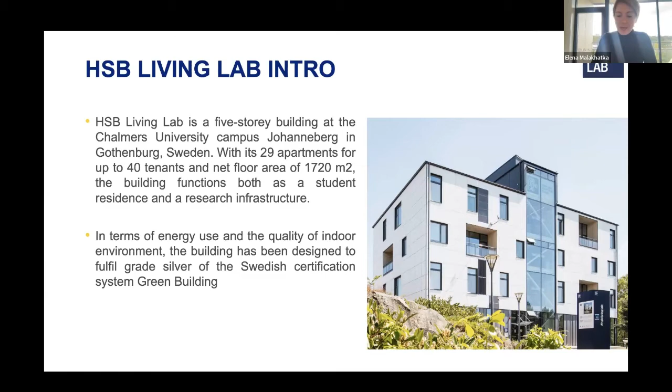Talking about the building itself, because I understand this community is much more interested in the building side, I'd like to highlight one thing: this building was designed to be placed at Chalmers for only 10 years. So those who were at the beginning of the process had to think, okay, in 10 years we need to move this building—we need to deconstruct it, disassemble different parts, and move it somewhere else. Now it's year number 8, so in a couple of years it's pretty high probability that we need to move this building from Chalmers, maybe even from Sweden—we've discussed a few places. Definitely those who designed the building understood they should think about deconstruction from the beginning.

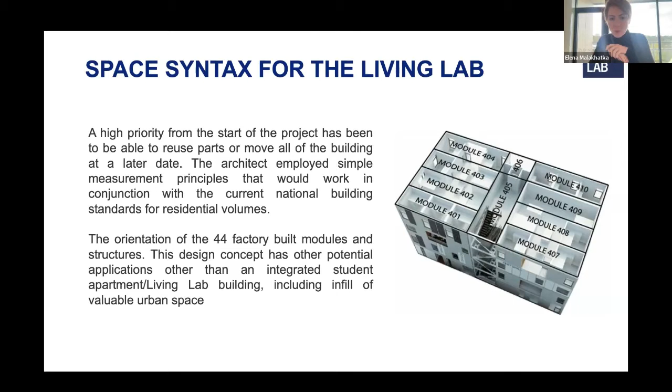So they of course thought about many modular kinds of projects. They considered the container mindset, container logic, where this building could be transferred as 44 factory-built module structures—so 44 trucks, or even less, might really help us move this building from place A to place B. That's an interesting starting point when you have the ambition to design a future place, but also from day one think you need to 'kill the darling' at least in one location and build it somewhere else again. So that's actually about understanding the context of flexibility and temporality in this specific place here in Sweden at Chalmers. This external factor of the building conditions also creates a very strong internal reflection, where we try to look at the rooms not just as square meters, but more as cubic meters.

How can we really interpret space in a much more efficient way? Even in our advertisement, when we rent out the students' apartments, we talk about cubic meters of life, not square meters, because clearly we make use of much more space than before, if we would not have this condition about container thinking.

So let's create a bit of a unique setting for this building, and unique setting for general perception of the space and its engineering and architectural style. And talking about that, as mentioned before, it's not only a building, it's also a research lab. It's a combination between two mindsets: living space and laboratory.

So we try to still highlight some topics and themes to focus on, but of course it's a very brief starting point. We can definitely go much broader, and my study doesn't fit most of these categories, but still: materials and technologies of the building, minimization of resources, multifunctional common spaces, accessibility—not only from the user perspective, but also how we can make this accessible for different stakeholders and different actors interested in innovation—as well as the production process, how we can really innovate the way we design, construct, and operate buildings.

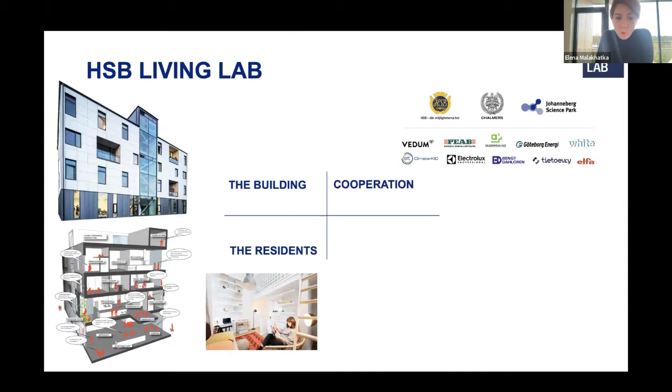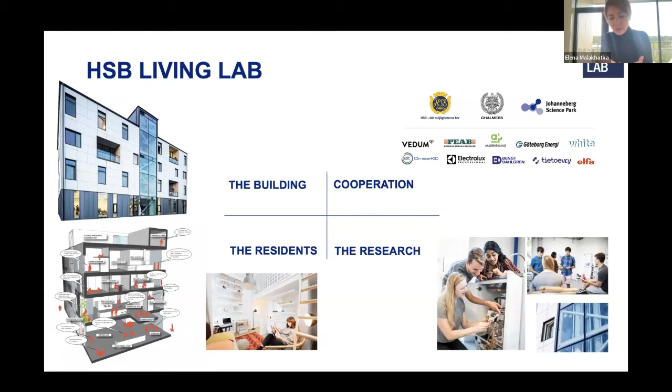We can't do this type of project alone, because we need different collaborations and cooperations, and that's, I think, what all of you are also doing a lot. And obviously research—all of this should be handled by a research process and research initiatives.

And if we come back to the definition—many of you know this definition, and many of you know about the European Network of Living Labs—they focus on a few things, such as real-life environment, iterative approach, co-creation, cooperation, rapid prototyping, and multiple actors and stakeholders. Once you have these elements, you can say, yes, we do have a living lab.

Because I think most of us have a lot of these projects where it's testing but only one actor, or testing but completely ignoring the users—not only tenants, but maybe users as designers or architects. So in this case, there are a few pressure points to call your project a Living Lab. I would like to really stress this.

But why specifically do we need to innovate with the user? Why am I trying to be this ambassador of the end life of the building, or use life and end life? Why is it so important now to talk more seriously about end users, and not only mention them in our occupancy rate energy plus modeling? I think the latest IPCC report clearly stated that if we want to decrease the carbon emission

footprint in our building industry—the middle graph B on the right side, building industry—the yellow color bar, which has the potential to go down in CO2, is called end-use technology adoption. And if you carefully read this part of the IPCC report, you will see how much pressure will actually come to the end user technology side.

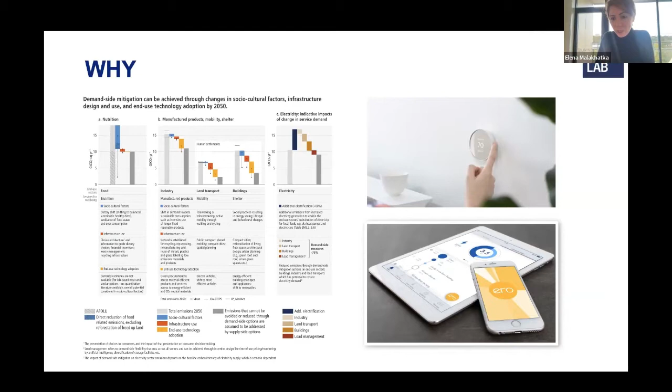And even if we say, oh, we're only doing facade in the early stage where we might not know who will use and how a user will interact with facade, well, depending on family size, depending on their activity rate, there are different strategies how we can address these things. Significant researchers over the world point that there is a potential and we need to grasp it somehow.

Talking about how, when we come back to HSB Living Lab as a project, we started with a lot of angles and perspectives to analyze, not only the physical aspect of the building, but also the kind of personality of people who will live here. Also culture—is it a multicultural place? Is it monocultural, and so on? We try to really work with different perspectives while doing the design phase.

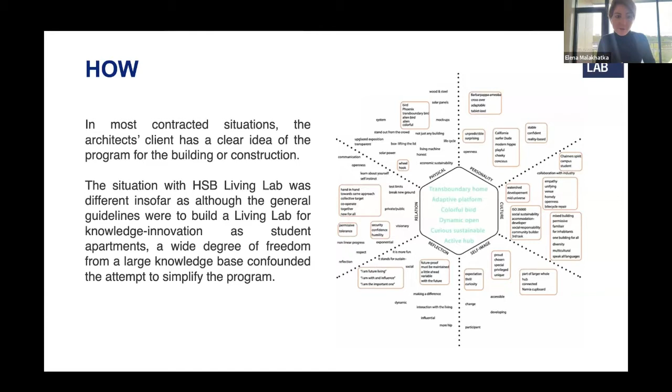Obviously, maybe some of you know Shea Hagy, the researcher who was involved in the beginning of HSB Living Lab design and development. He was a very strong believer in collaboration between different actors at the early stage. He believed that we need to bring those who will live in this building—in our case, we knew it would be students—and we need to start working with them before we even put the first foundation layer.

Many of you know this report, Next Generation Living Labs. The TU Delft project is also mentioned and highlighted well there. So we would say that in the beginning, it was this hypothesis that by understanding daily behavior in high resolution, we can design a better building.

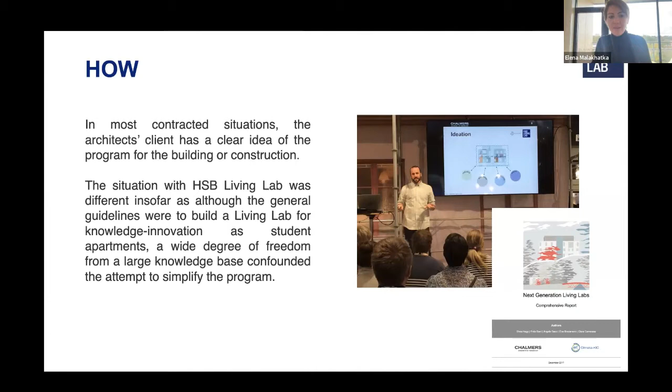And this hypothesis actually validated itself over time, as we're now almost at the end of the first iteration of this building's life—and it's an ongoing project. If Shea was more focused on the beginning of the design phase, how to design spaces, how to consider things, it shouldn't stop just at the design phase.

It should continue. And that's where my role now comes in, doing a lot of participatory activities around everyday life—how they cook, how they do laundry, how they clean, and so on. Because life is happening now, and this life requires resources, which the building is supposed to provide to our tenants.

It's not only about saying it's a research project, please participate, but also understanding that we have value to co-create with you—help us to do a better product for you, help us to deliver a better service for you, better comfort, and so on.

And definitely there's a good and bad side to doing this in Europe—there's very strong pressure from the ethical approach, which I personally respect a lot. Yes, it might slow down the research project, yes, it might create pressure to remove some elements, but it also in the end builds trust, which is not always the case when you just have access to end users.

HSB Living Lab Plus is also the idea that Living Lab is a starting point for how we can go outside to the neighborhood level. In one of the projects, we needed to consider more social groups, and I asked HSB to contact their members and go outside just our Living Lab. So Living Lab, again, I always consider a starting point—a dot on the map from where we can build more strategies to collaborate with citizens and other stakeholders.

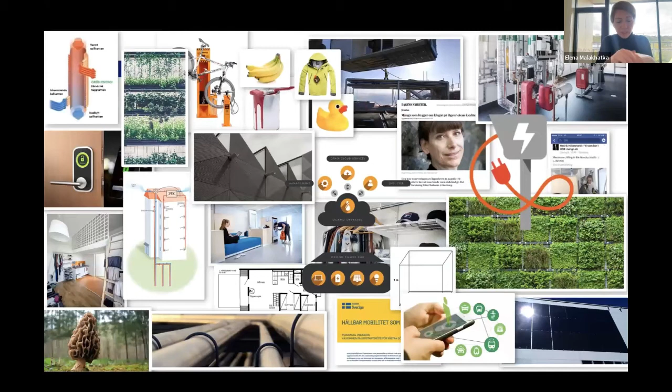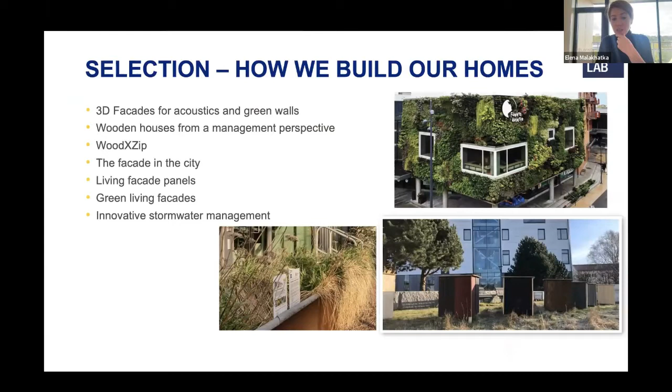To wrap up what I said—more than 200 projects so far have been tested at HSB Living Lab. I'll start with a topic which probably most of you are interested in: there's a lot of work on facade, and we've tried different types of facades and projects related to them—how we can really do diversity. We created a structure with exchangeable wall elements, so we can test different types of insulation materials or PV panel solutions.

So facade itself is a kind of living lab, and we can compare different rooms, like indoor comfort and energy consumption from heat and so on. The idea of flexibility, and the fact that this building is temporary, creates this opportunity to make the building much more flexible for research.

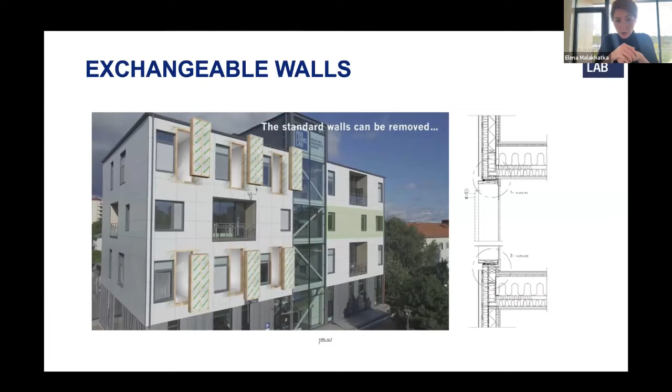Of course, a big part of the research portfolio is energy, from facade and PV panels, battery storage and energy management systems, smart apps, heat recovery from the showers. The list is huge, it's really an important topic.

But my one reflection here is that it's not only about doing research, but also sharing research with society. I was surprised when I announced the Everyday Energy seminar this spring, and the room was packed with neighbors and ordinary people who have so many questions while we have an energy crisis in Europe. So the Living Lab is also a place to meet and really share knowledge and do valorization with society. I was surprised how big the interest actually is towards this topic.

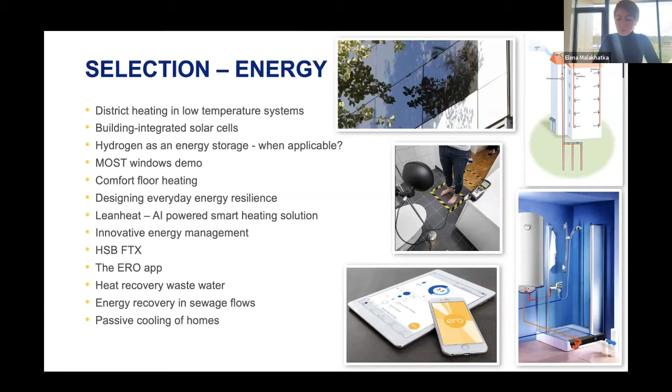Obviously, water is a big discussion, and there are a lot of studies on water quality and so on. From one side, you can say, well, in Sweden you have a lot of water, why do you care? Because we think we shouldn't be so selfish and only care about ourselves, which is part of the journey here.

But also, can we collaborate with South Africa and help them with avoidance of zero water day, which they had a few years ago? How can we really develop technology which can be used in other parts of the world?

That's where the 50 liters program comes in, where we try to minimize consumption and really see how we can be smart enough, but also without compromising comfort too much. So there's a lot of technological tests happening in our showers. In my shower, I have several solutions for water cleaning or heat recovery from the shower.

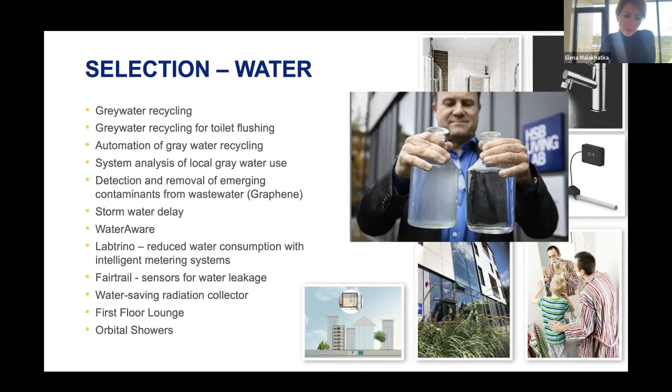Laundry, a little bit of the history. HSB was the pioneer 100 years ago in public laundry, the idea that laundry could be shared as a social place, but also infrastructural sharing, since not all apartments here have laundry machines and dryers. So it's a pretty central part.

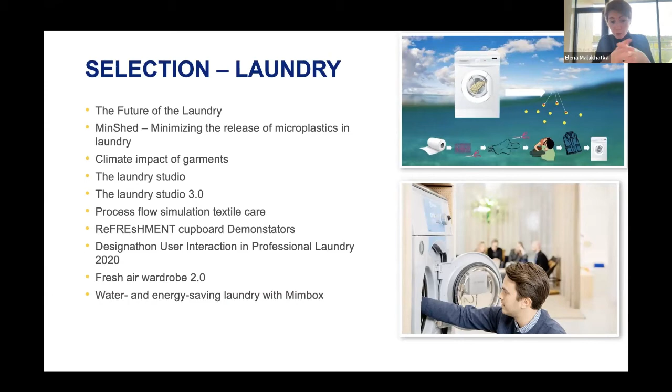We also went really deep into understanding different behavioral aspects and water quality, because today we already recognize that all these laundry systems deliver a lot of plastic into water systems, and we try to solve this type of problem.

Of course, resource management on all scales, from materials of the building to how users treat their own resources, such as clothes, mobility, and so on. How we can support both engineers, construction side, and others.

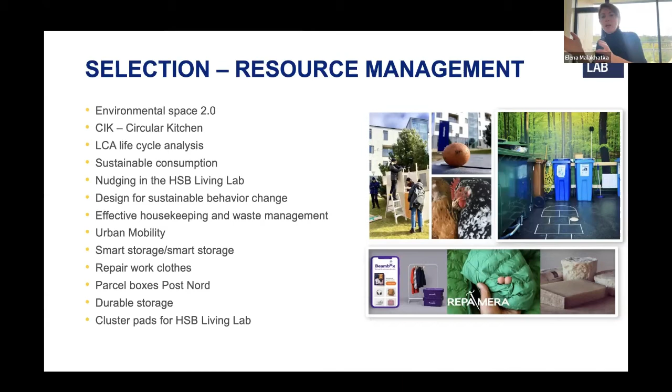Now, for example, from the construction side, we have a big project related to designing with earth. We are testing the clay wall indoors now, but we will also test outdoors since next spring. So it's a lot of discussion about more of a Sankey diagram of resources within this building. I'm just checking the clock.

Yes, I have a couple of minutes. Definitely about how we live, it's a lot about food systems, resource materials, sharing stuff, and so on. It's a very socially focused type of study.

But again, the question is how it might relate to, let's call it facade and design. Because sometimes some students have a balcony with sun, some don't, and they are really designing solutions for how to create events on the sunny side of the building. So even in the use stage of the building, there are a lot of possibilities to reactivate the initial ideas of architects and building designers, showing that the potential could be used even more.

The same with these exchangeable walls, how we can really understand the life inside from the point of which type of facade is designed in a specific part of the building.

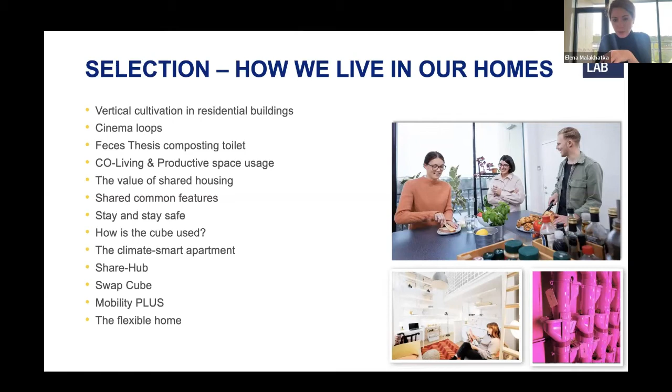And definitely smart home is relevant, as Sweden is in general one of the most digitized countries per capita. We definitely consider the topic of technology in our home, but also the discussion of how to balance the presence of technologies with respecting privacy and ethical attitudes, how we can really approach technology with respect to users' needs and preferences. That's where the idea of co-creation and shared responsibility becomes crucial to succeed.

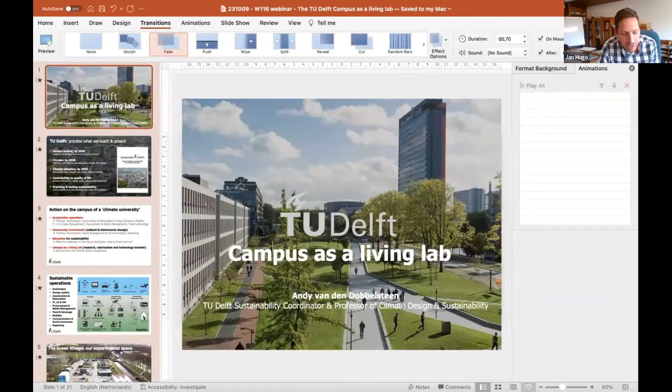Andy will be sharing with us work on the sustainability ambitions of TU Delft, where one goal is to make the campus a large living lab for sustainable innovation and experimentation. They're looking at an entire transition of vision, ambition, action, and an action plan written with a budget of 100 million euros. Of that, 20 million euros is allocated for innovation on the campus, for which a governance structure and decision process was designed. This is currently in use, and researchers can submit their plans for innovation, pilots and living labs, which are assessed by a working group that advises the Campus Innovation Committee. The first of 6 has been approved and will now be starting, and Andy will be sharing some of that work.

Andy, we can see your screen now. That's all working, yeah, we can. Perfect, thank you very much, sorry, now it's doing something terribly wrong. I was trying to get my microphone working again, and now it's doing something I don't do. Okay, anyway, I'll pick it up, thanks Jan. Maybe I'm not visible, can you hear me or not? We can hear you perfectly and we can see the screen. Okay thanks, but you can't see me I guess, right? We can't, let's see if I can switch on your camera as well. Why is it doing this?

Okay, I will just move quickly because we lost quite some time. So at TU Delft, we have our sustainability goals for 2030: carbon neutral, circular, climate adapted by 2030, contributing to quality of life and biodiversity, and also exploring and testing sustainability on the campus. And that, of course, links a lot to the living labs that we're talking about today.

What are we doing? We have a rector who says that we want to be the climate university of the world, so we need to take action on the campus as well. Sustainable operations are an important part of that. Community involvement also, because we want to involve students, academics, but also supporting staff, management, visitors. Our core work, of course, is in education, so we're now looking how to implement sustainability in education at every faculty that we have. And related to research, the campus should be functioning as a living lab. So we're not talking about separate living labs, but the campus as a whole should be a living lab for all sorts of innovations on sustainability.

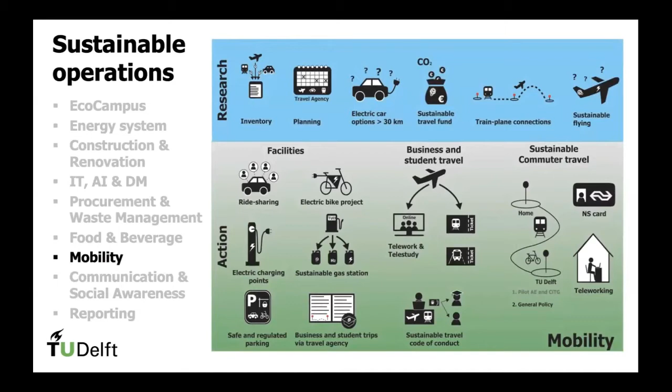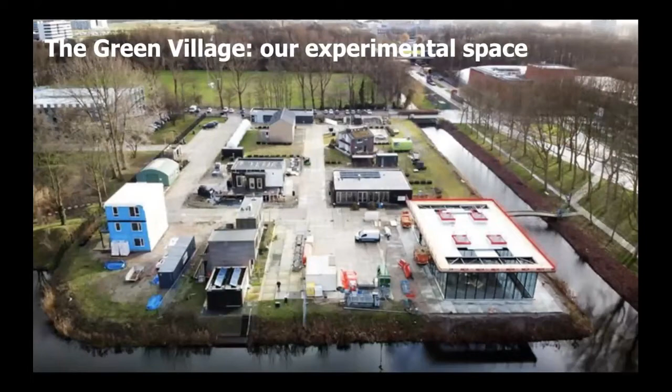Apart from the action taken at our university, we also link it to research, so that what we do is actually being assessed, evaluated, and changed when necessary. Now we have the Green Village on our campus, which is an experimental site where the old faculty building of architecture was situated, where we test out all sorts of innovations, mostly related to sustainability of housing.

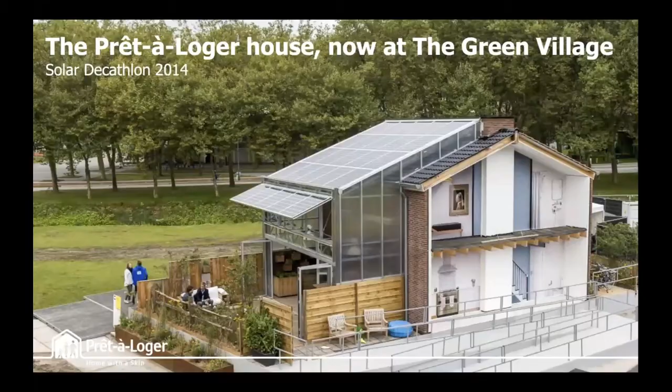To give some examples, this is one of my Solar Decathlon projects with the students from 2014. It's still there on campus. It's now being used by a Ukrainian family, so refugees are living there now, and they're part of the experiment as well. We also have the MOR Pavilion, from Solar Decathlon 2019, which is now functioning as a meeting space on the campus.

So these are real life living labs that are functioning. The last Solar Decathlon project we did sadly stayed in Wuppertal because they have their own living lab over there. It's now open to visitors from Germany, and we decided not to take it apart and travel back to the Netherlands, but leave it there, which is about 3 hours drive from where we are in Delft.

Now, these are things that were already happening, but we also have our sustainability program, which has 20 million euros available until 2030 to invest in innovation on the campus in the form of living labs. There's an innovation funnel for decisions on which projects we do and which we don't.

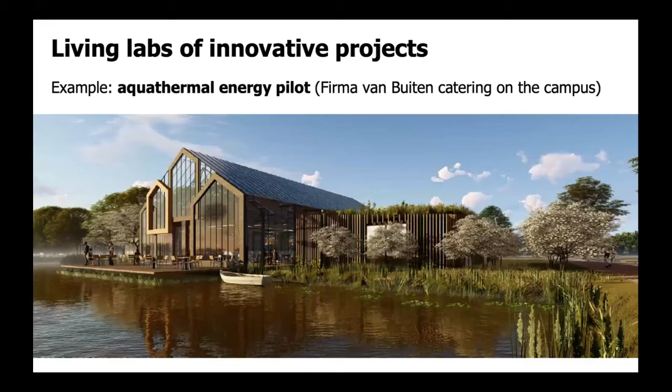But also other things we're doing on campus are being monitored a lot. We have two buildings that are energy neutral according to calculations, but of course we need to monitor and see where it goes wrong, if it goes wrong, and if we can steer it.

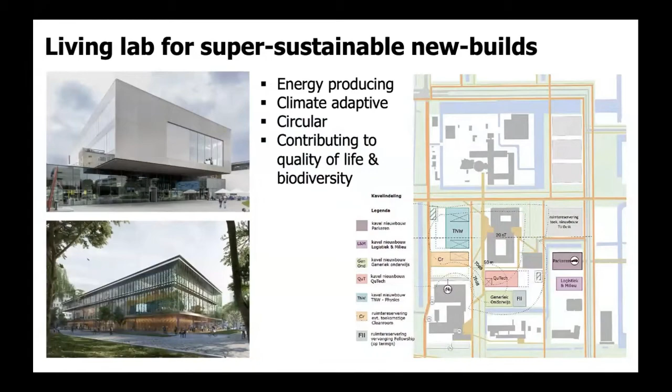There's new developments on the South Campus on the right-hand side, where all these new buildings have to be super sustainable. And of course that requires some innovation here and there.

Also our energy system, which we're adjusting to geothermal heat on one hand and renewable power production on the campus, is actually a living lab where we test out all sorts of things, especially interseasonal storage systems for high, mid, and low temperature systems, to see if that functions well, if we can exchange energy, etc.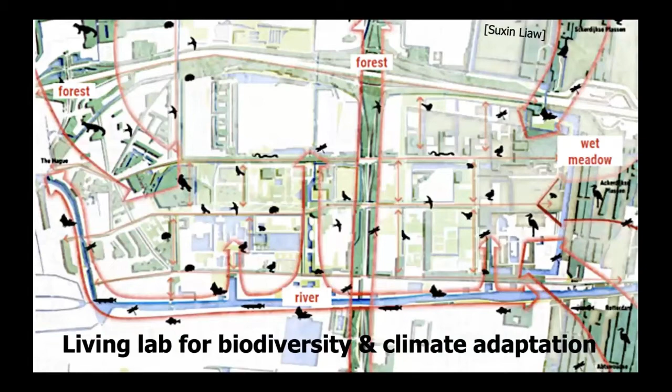We also approved a plan to combine biodiversity and climate adaptation. There's a strong link between these two. So bringing in valuable green space and water storage on the campus will also help to become more climate adaptive. That's also something we are measuring at the moment, and we will keep measuring in the future.

An interesting thing is also a living lab for a new financial approach. So the total cost of ownership with a CO2 price is being used at the moment for all important financial decisions. That's really important because the current economic system doesn't really support sustainability a lot. It actually leads to the choice of other things.

In procurement, we are trying to get our supply chain sustainable by using the R-ladder, starting with refusing to purchase things, reducing demand, reusing products, etc. But we cannot do it alone. So we have new agreements and circular contracts, which is also innovative, with suppliers and partners that collaborate with us so that they can actually change their supply chain.

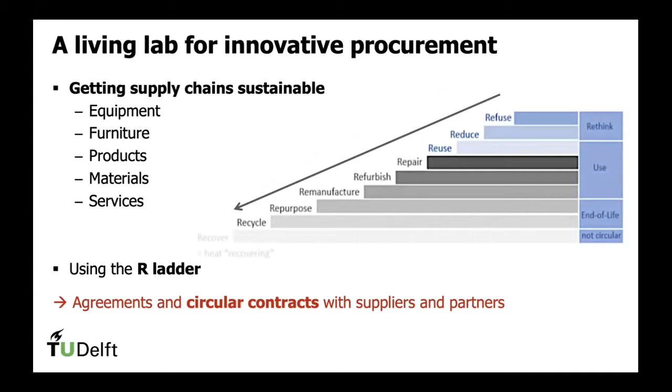We're also a living lab for sustainable food on the campus. This, of course, has caused quite some turmoil because we decided to go for much less animal-based food, which is actually scientifically supported by the Lancet journal, which did research on what is a planetary health diet—a health diet that the Earth can carry. We decided to go for food that follows this division of types of food, and as you can see, about 90% of it is plant-based with a little bit of animal-based left over.

In our case, it means that we have some vegetarian and vegan restaurants at the moment on campus, not all of them yet, and not all will be changed. But that's also important to measure, to see how people behave and if people are satisfied. At the moment they are, but there's also still variety to choose from, and we'll have to see if that works.

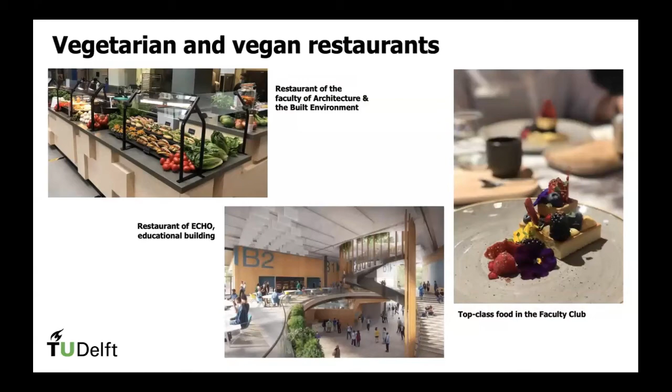A more innovative approach to food production will be to combine buildings with food production on the roof and in facades, to find synergetic effects with carbon emissions, waste, and nutrients in wastewater, and also to make those greenhouses support the energy system of the building. That's also something we want to test out. It's not there yet, but there are several research projects already doing that.

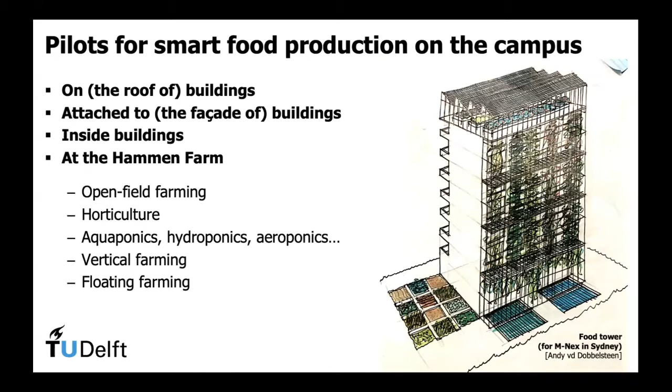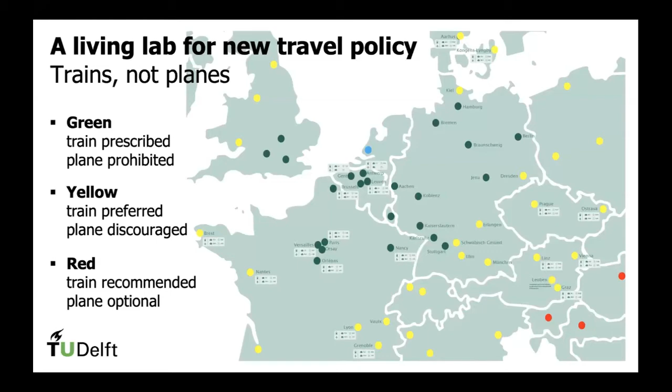Another interesting one is travel. Travel is one of the most carbon emitting activities from our university. In Europe, we decided to go for avoidance of flying on short haul distances up to 800 kilometers or 8 hours of train ride. You should actually take the train or a bus or electric car. Even in the rest of Europe, we are supporting other forms of travel than just flying, unless you have really good reasons not to. This is being monitored as well to see if it works.

Altogether, you can find the latest news on the sustainability website of TU Delft. Good to mention also that we are not the only one taking action. Chalmers is a university we collaborate with, also Aachen, Milan, and Zurich. We produced a report describing the 5 different approaches across these universities, and I recommend you download it. It's available for free as a PDF, and it can inspire other universities to do similar things. That's what I want to finish with, and I'll give the floor back to Jan.

Thank you very much, Andy. This was a very quick and jam-packed presentation, so I'm sure we'll have lots of questions. You had to catch up. Yeah, thank you for that.

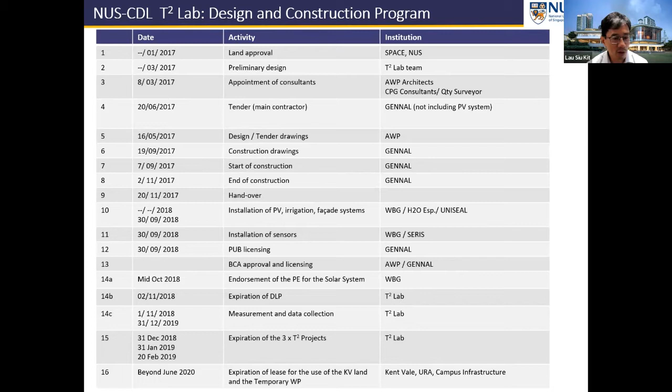I will skip this video because it's probably 2 minutes long. It's kind of construction. You can see what it started from at the very beginning.

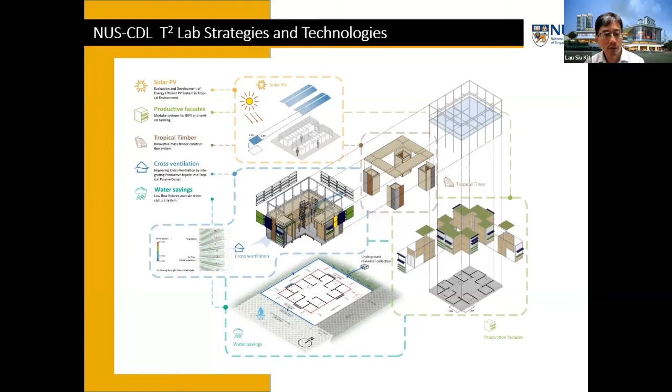The building itself is built with more than 200 sensors. We have a weather station, and indoor and outdoor sensors to monitor wind speed and temperature. We also monitor solar energy and other things, including temperature, humidity, air velocity, solar irradiation, light intensity, and flow rate.

The original design is self-sufficient. We are fully powered by the roof panel, but right now we're connected to the power grid because for some experiments we have used more energy than expected. So we also have the option to switch to the grid and draw more power if needed for the experiments.

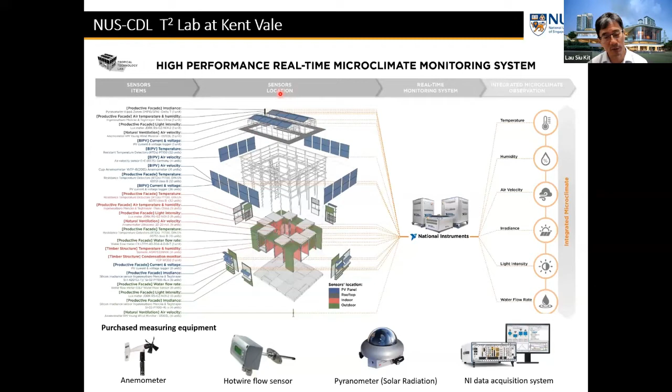The building design, in fact, has 8 small rooms, each around 1.8 meters by 1.8 meters, very small rooms. Each side of the facade faces exactly east, south, north, and west.

From our first run of tests, we wanted to test the balcony versus without-balcony effect. What you see here in the drawing is the first setting: one unit is with a balcony, another unit without the balcony, so each side has 2 rooms in the same situation. That's the reason we can collect data simultaneously for 4 sides of the facade under different settings.

The other 4 corners, in fact, are testing the timber structure. Even now we are testing another setup, more focused on the co-location of solar energy and food production.

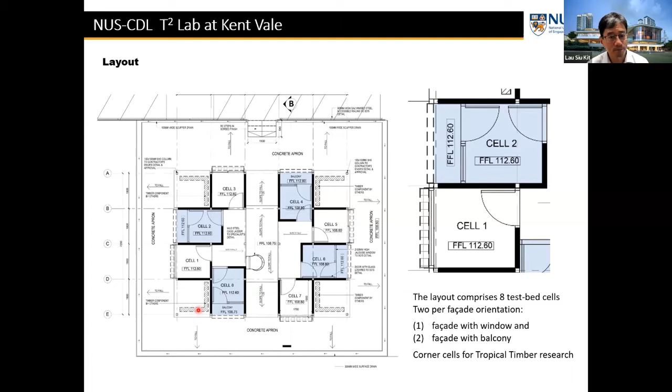Here's one of the early projects. We test the productive facade, including different types of facade on the four sides to test.

We also collaborate with one of the largest solar energy research labs in Singapore under NUS, called the Solar Energy Research Institute of Singapore. We collaborate with them to try to develop the first digital printing.

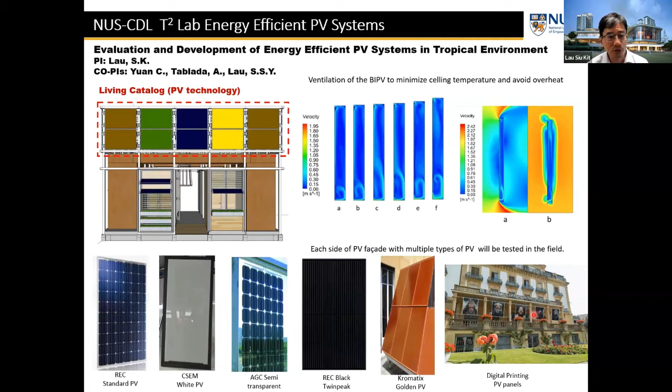Probably the first generation may not be good enough, but in fact one is sunset, one is underwater - two photos we use for testing. But the technology is getting better now in Singapore for us to do digital printing.

And we also use the roof panel, as I said, to supply the power. We can change the setting easily to test different PV panel technology.

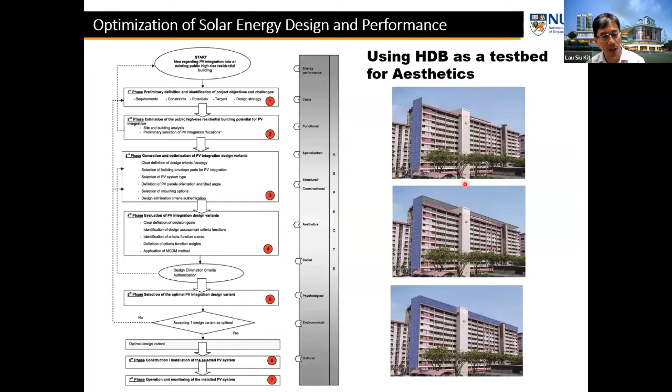We also reach out to our public housing to test opinions about the photovoltaic panel. So one of the tests uses a survey to try to understand different architecture of the building integrated photovoltaic panel.

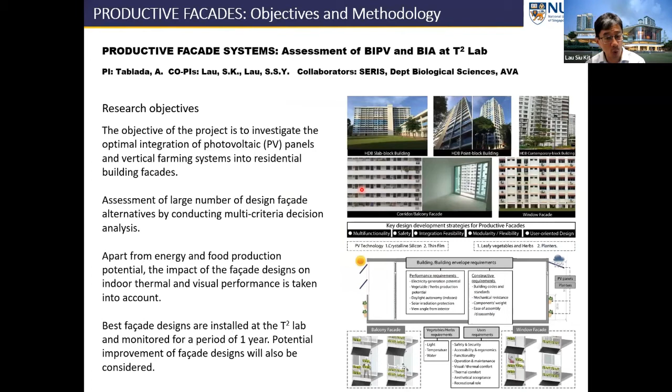Another project, an initial project, is the productive facade. We also have a setup exploring how we can co-locate to generate solar energy and food production. This is the first set of the project.

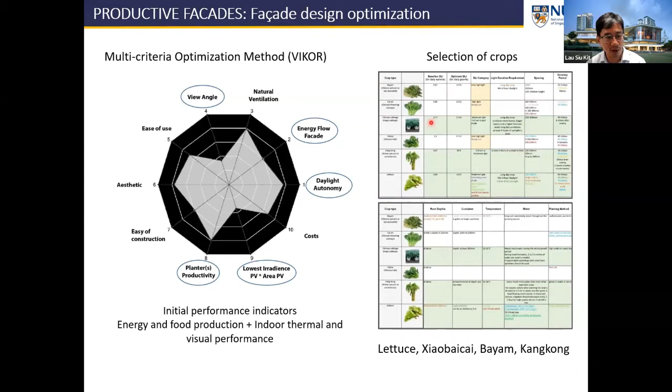We test different species of food plants and different requirements, aesthetically, and we also analyze different settings of the productive facade to try to collect solar energy and produce food simultaneously.

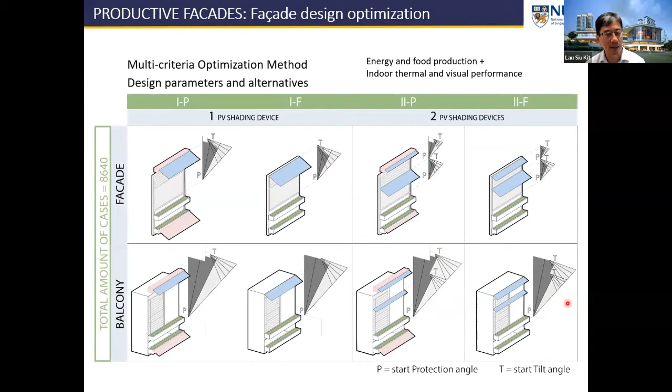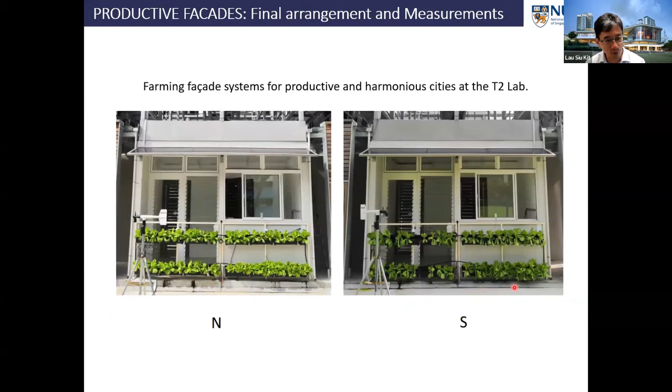So here are some illustrations for our project, and here is the outlook for our first run of the productive facade. Here we also do some subjective surveys for the productive facade.

Another project, certainly we're also interested in cross ventilation. Our facility also allows us to test cross ventilation.

All the windows can open, besides all the windows can open. In fact, all the doors have louvers to enhance ventilation so that we can test ventilation. Now, as shown here, we're also testing the greenery's ventilation resistance and flow resistance of the greenery.

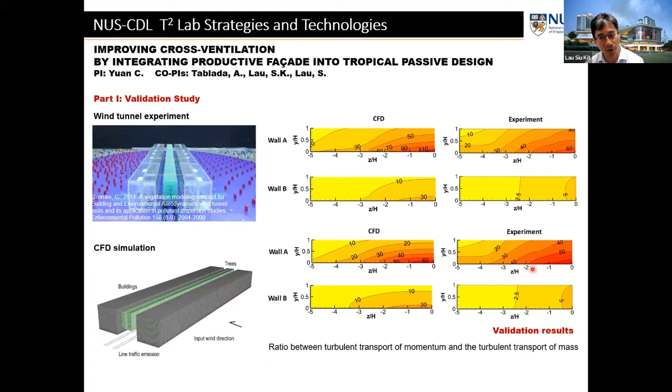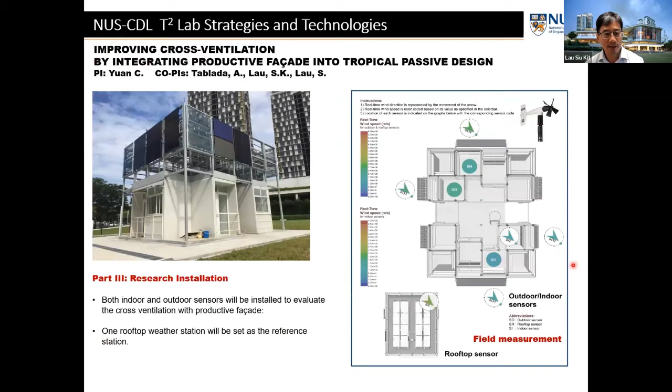So here are some of the projects we're running, and there's the cross ventilation project, and then the first run of the design.

In fact, we have four projects. This is the four projects we run beside the solar energy, productive facade, and also cross ventilation.

We're also interested in the timber structure. So at the four corners, we place different timber structures and try to understand how they deteriorate, the color change over a long period.

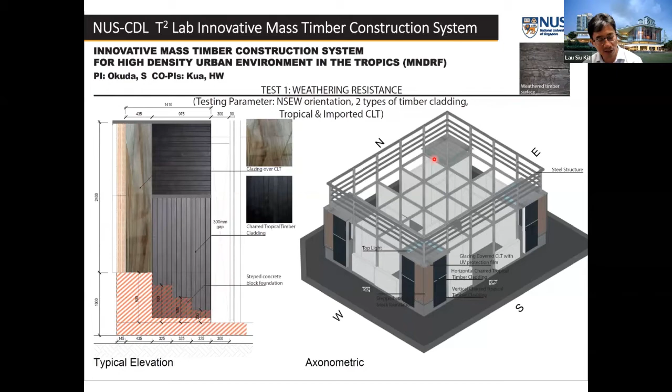Even though the lab has already been there around 6 years, we still keep monitoring their moisture content, color change, and how they settle.

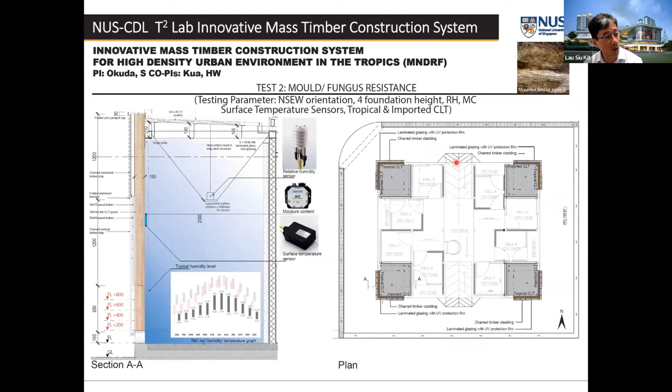So that is one of our projects. We want to see how timber structures can be used in Singapore because we know this is more carbon neutral - we can build more carbon neutral buildings.

So in general, I think I may end up here. So let's see whether we have any questions. I will give that floor back to Jan.

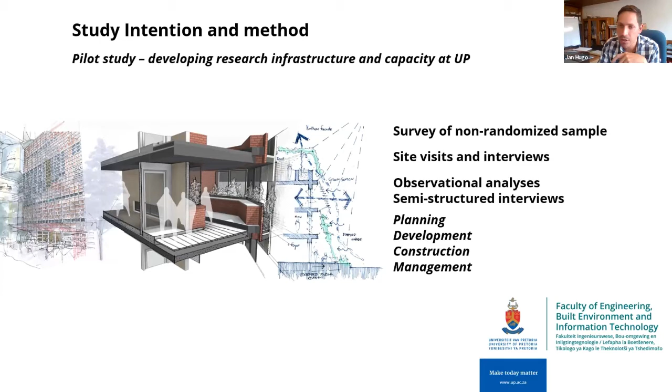And for this, we've visited and surveyed a number of sample projects and interviewed researchers or managers from those sites. The intention was really to understand the planning, development, construction and management of it. So not only to visit the sites and see what's being done, which is really always very interesting, but also to understand what goes on behind it in the process.

So we've managed to define 7 projects thus far and visited some of them. It's in 4 regions: 2 of them in South Africa at CSIR and NHBRC, and then engaged with Eddie at Singapore University, and Elena at Chalmers, and Andy at TU Delft.

And then I've also managed to contact and be engaging with the Flex Lab at Berkeley University in California and the Technical University of Denmark as well. So starting to understand and see, I get a general picture of different projects.

And obviously there are numerous living labs and building technology laboratories worldwide. And the themes that they cover, as we've all noted here, are really wide. In many ways, one could think of them as considerations into efficiency, sustainability, resilience as well. And a big driver there is this question of services integration and what that means.

And what's really interesting, and I think as Elena started presenting, is the idea of post-occupancy assessments and what does it mean when we work with people in the process.

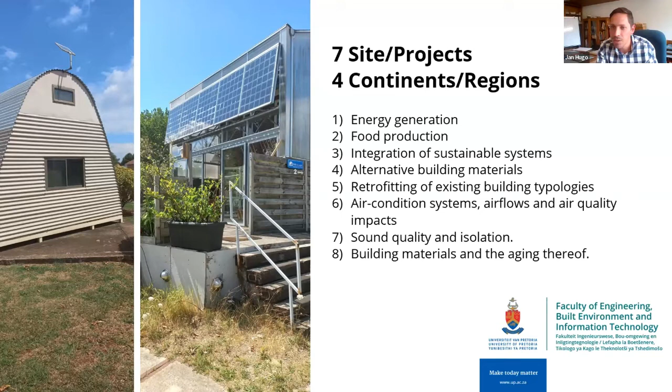So this is a slide I would have shown at the end, but I always think it's really critical to talk about this in the beginning. These sites, for me, when analyzing them, really present context for integrated technology application, where we can start to integrate and

coordinate solutions, but really importantly, starting to work in interdisciplinary research. And there's often lots of talk about it, but it's often really quite complex to achieve. But these sites present the context within which one could do this. And I think that is really one of the important reasons for developing these sites.

And certainly, as we've seen, there's been a shift towards transdisciplinary work as well, where we can start looking into co-designing and expanding the end user in there. Certainly an important theme to further develop as well.

These sites also present nested solutions and hierarchies of nested thinking. So I think from a paradigmal thinking of questioning what the trajectory of sustainable thinking is, I think these experimental sites or laboratories start giving us points of higher level sustainable thinking, which is also really important, I think.

So apart from interdisciplinary work, we can also see work that starts dealing with ways of nested integrated solutions, and those are really drivers towards resilience and regenerative thinking in the process. So how do they manifest, and what do we see here, and how are they managed in the process?

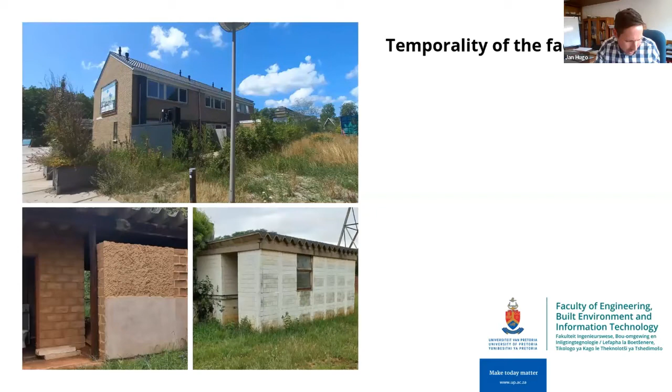I think one important, really critical quality that I've picked up from reviewing the project is the notion of temporality. And I think it's been mentioned already, that being temporary presents an opportunity. And suddenly one can build a building that has a very specific focus, but also can change over time. And it's interesting to see that they're therefore often planned around temporary leases, using leftover spaces and so forth.

But I've also visited sites where that notion of temporality actually turned into long-term structures. And like colleagues of mine always say, there's nothing as permanent as a temporary solution. It's not always intentional, but these sites play such an important role that I've visited sites which actually start to have heritage status.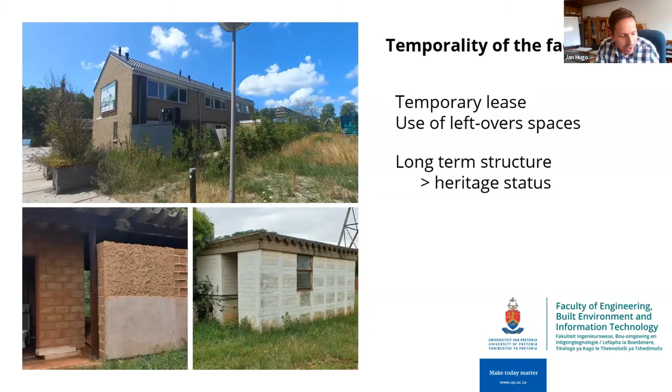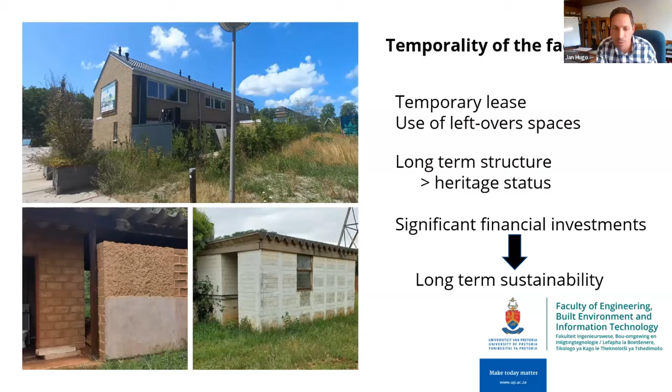There's many reasons for that. One is a question of management, but certainly these sites all have significant financial investments associated with them. So what we're seeing is a number of projects starting to look for ways of increasing sustainability, long-term sustainability. I think that's an important shift one can explore, how do you make this a long-term solution.

Within that, when you think about that notion of long-term application, continued flexibility is needed, and that was presented by many, as you've seen, as the idea of flexible systems, flexible services, flexible building elements, as a means of ultimately optimizing that investment undertaken. And along with that comes certain inflexibility, which I think is critical.

This reminded me of Stewart Brand's work on the 6 S's of flexibility, and the site in these cases often presents the point of flexibility, becoming what he calls the low road site. But certainly there's lots of inquiries about inflexibility in there.

And then I think it also presents an opportunity, as Elena noted, in the HSB building, where there's an inquiry in terms of dismantling the building, what that entails in the process. But there's a number of these sites that one could explore.

In order to achieve that, I would argue that we see the scale of the facilities and the experiments being of a smaller scale to enable that. A number of the sites were much smaller in scale, much more working from ground level effectively.

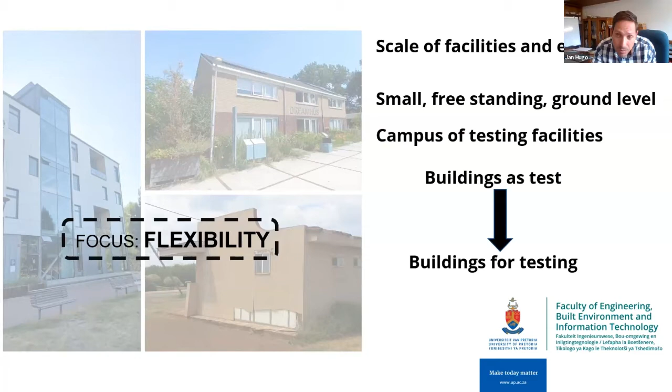And I think that's an important decision to make if one ever develops it, to understand the nature of that investment that your institute will be making.

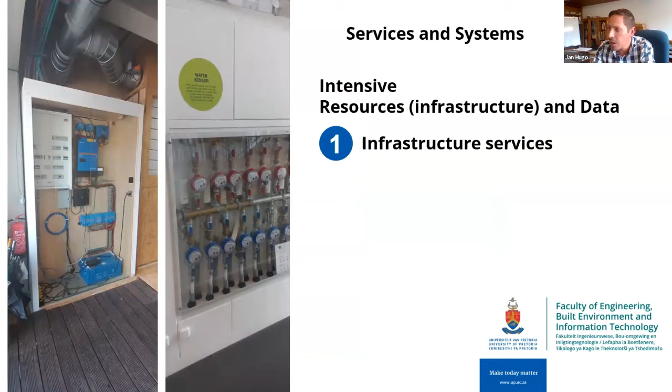And then, as I noted and seen in many of the previous projects, these are, from a services and systems point of view, intensive projects with intense inputs, ultimately requiring significant focus on infrastructure and services, and also the data management and data collection in the process. I think that's an additional stream they have to work with, and it's often considered.

A question I've seen a lot, working with some of the work that Eddie presented, is where you start seeing the opportunities of digital twinning take place. I'm sure we didn't discuss it fully in our discussions, but I'm sure there's sorts of opportunities there because of the data that is available in the process.

Because of that, I think one thing not to neglect in this process is to understand the role of management. People's skills and expertise, as has often been noted by many, are really needed—and not only researchers, but actually technical staff, the management and maintenance of these, which I think is not often necessarily part of the initial project conception. That diversity and range of skills are certainly really important.

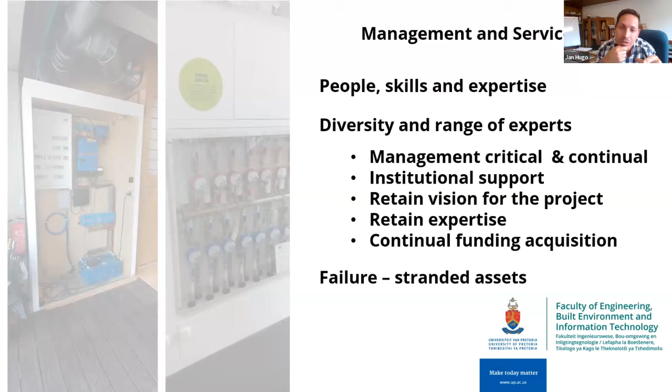Many of the respondents I spoke to talked about the importance of having a focused management role, but then a broad buy-in from institutional support—multiple people buying into the vision of the project, but really focused management in that. There have been cases where management support, retaining a vision for a project, and continual funding has been lacking, and those really end up being stranded assets. So yeah, certainly an important role to play there.

And I think one aspect that I've learned from these discussions is the importance of an advisory board, a group that can manage that vision or scope for the project, and use it as an opportunity to leverage further work.

I think it's really important to note that it's not about the building necessarily, but about people. Individuals like us working in the built environment often think once the building is built, we've managed to do it. But certainly that's not where it lies. It's really about how do we get the expertise, how do we retain that expertise.

An important notion shared with me was one manager saying there's funding to start the project, but often very little to maintain it for the years coming. So there have been ways other projects achieved sustainability, by charging cost for data or access to the site, critical to ultimately achieve long-term sustainability. But these present ways for universities and institutes to leverage their work and a foundation to develop projects, a critical bridge between theory and practice.

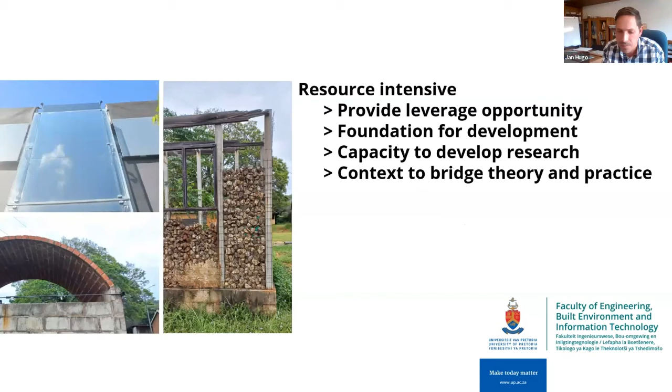So just to conclude very briefly, these building facilities, or living labs, or building technology laboratories, present the opportunity to build local research capacity, a critical factor for developing contexts, like for instance the Southern African region. And similarly, as Andy noted, it provides an opportunity to promote eco-literacy and the university as a role player in achieving local sustainability or local climate adaptation and resilient systems.

And then finally, there are numerous calls from numerous fields already saying that integrated complex solutions are needed, but we need a basis or context to do this work. And I think we need to look at the way that integrated systems work together.

So my question, which I think one could work with, is this: how can one disseminate projects like these in broader and other contexts? Is there need for collaboration on a network basis, where one could look at ways of not necessarily having to build all the infrastructure in these other contexts, but validate and test a small portion of a possible project, to ultimately conceptualize further application of solutions within other contexts to localize adaptation or sustainable systems?